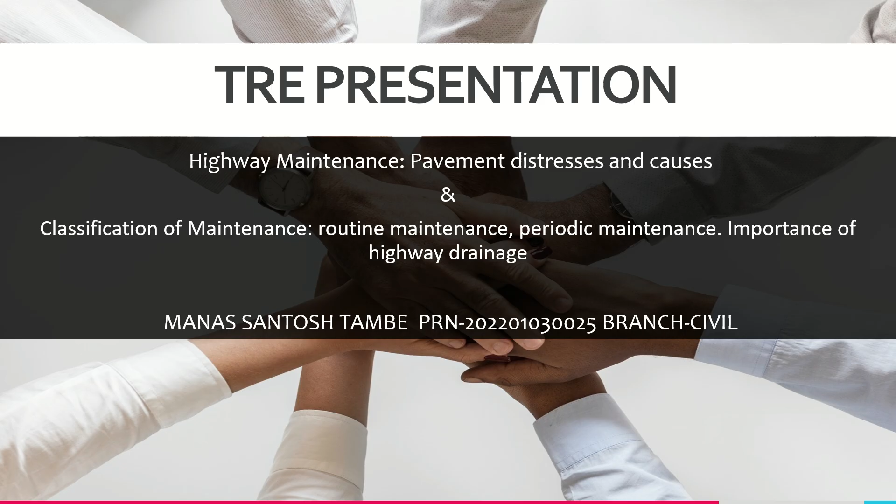Now, coming to the introduction part, we can see highway maintenance involves all activities undertaken to preserve and restore roads to ensure safe, efficient, and comfortable travel, which is a definition of highway maintenance. Coming to objectives, or why highway maintenance is essential for our life. First is ensure traffic safety and driving comfort. Second is prolong pavement life and prevent deterioration.

In our first objective, that is ensuring traffic safety and driving comfort, if there is a road which is not maintained properly, there can be high chances of traffic generation in that particular area, which can cause a high volume of traffic in that area, and which can be hectic for the people traveling through that area. So maintaining that particular pavement can be very useful for the people as well as the government to reduce the amount of time required for a person to travel from that road, as well as early maintenance can lead to less economic problems compared to afterwards. Then second is prolong pavement life and prevent deterioration.

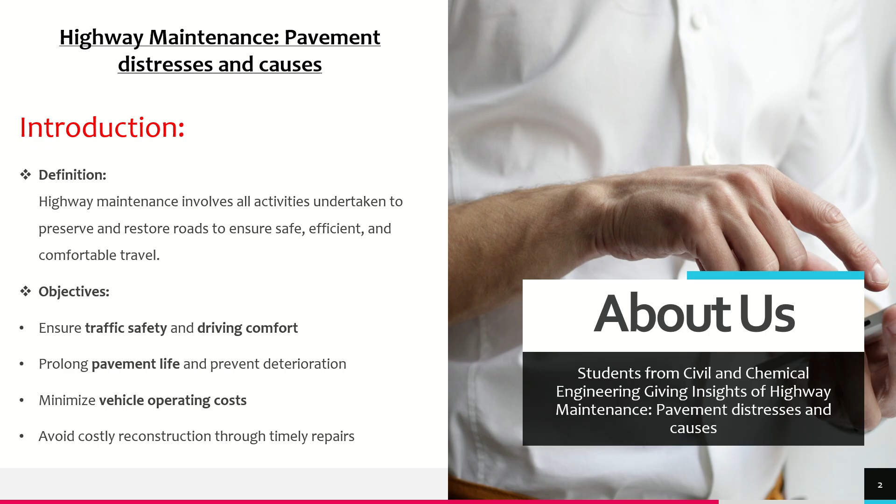Coming to the types of maintenance, first is routine maintenance, which is day-to-day minor repairs. Second is periodic maintenance, which is scheduled interventions like resurfacing. Third one is preventive maintenance, like measures to prevent future deterioration. Fourth is emergency maintenance, immediate response to accidents or natural damage. These types of maintenance we are going to see in detail in our further slides. This is a short overview of types of maintenance.

Coming to importance of highway maintenance, first is reduces long-term maintenance cost, as we discussed in our first objective. Second is improves road user satisfaction, like if I travel on a good or stable road, I feel a comfort level while traveling, as well as a driver who is driving his vehicle also feels comfort in traveling on that particular pavement.

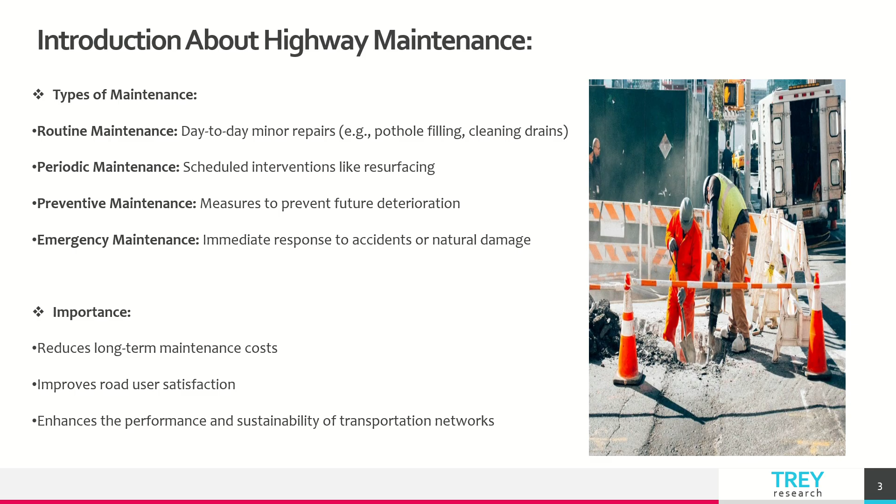Third is enhances the performance and sustainability of transportation networks. Like we can see there are various types of roads: national highways, state highways, village roads. Each have their own transportation networks. So while maintaining this, we need to take care of each and every aspect as per the type of roads in our region as well as state or country.

Then coming to introduction to pavement distresses. Pavement distresses are visible effects, defects or damages observed on road surfaces. They indicate structural weakness, functional failure or aging of pavement layers. Common causes of pavement distress are, first, heavy traffic loads. Heavy traffic loads means we are designing a pavement for a limited load, but generally commercial vehicles overload their vehicles, and due to this heavy loading, the pavement gets hampered or damaged.

The second is environmental effects, which are rain, temperature, freeze thaw. Generally freeze thaw can be seen in less temperature regions like Shimla, Manali or Kashmir. Then rain regions, we can see in Mumbai, Konkan, as well as in the southern side like Chennai, Tamil Nadu, etc. The third is material fatigue and poor quality of construction.

Like material quality, like using low grade of concrete, low grade of bitumen, low grade of steel for concrete pavements. Then poor construction quality, like various contractors are there for gaining their profits. They use low grade materials, due to which early damages happen in roads or the pavements, and due to which we need to do the maintenance of road very early.

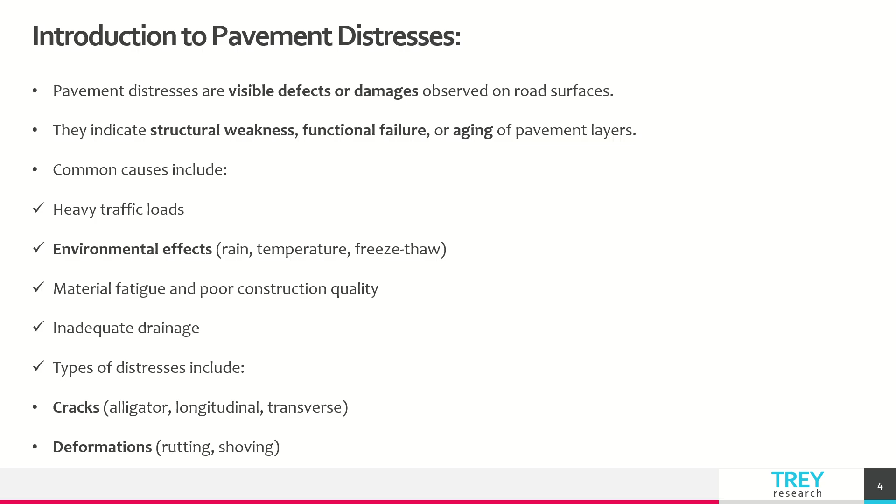Like generally we do maintenance in 3 to 5 years, but due to such poor quality of construction, we are forced to do the maintenance within 2 years or 1.5 years. Fourth one is inadequate drainage. The types of distresses include cracks, deformation, then surface defects, disintegration. These are the four types of pavement distresses.

Also, there are many types of distresses which we can see in the image, that is blow-ups, corner break, durability cracking, faulting, joint seal damage, longitudinal cracking, map cracking, patch, then punch out, separation, shoulder drop off, spalling of joints, and transverse cracking.

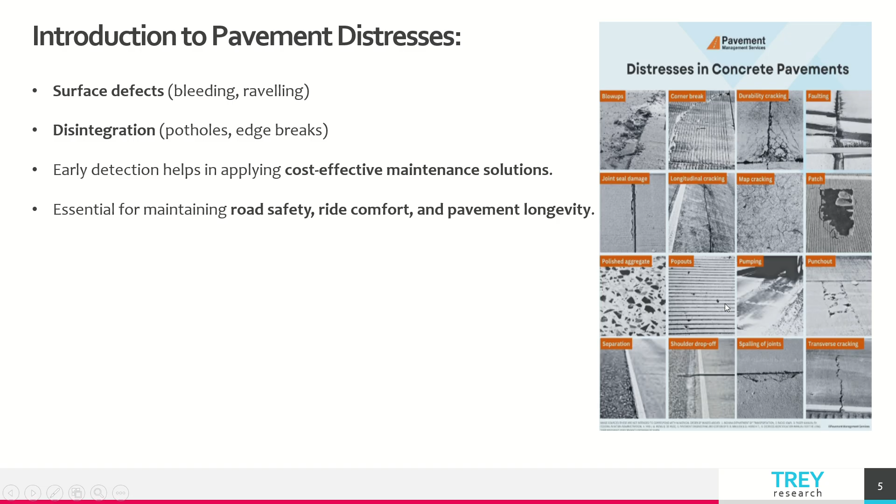Coming to the classification of pavement distresses, first is cracking distresses. This involves the development of visible cracks in the pavement surface. First is alligator cracking, interconnected cracks due to repeated traffic loads. Longitudinal cracking, cracks parallel to the center line caused by construction joints.

The third is transverse cracking, cracks perpendicular to center line caused by temperature changes. Earlier we saw it was due to construction joints, now we are seeing it is due to temperature changes. The fourth one is block cracking, that is large rectangular cracks due to aging and shrinkage of the bitumen.

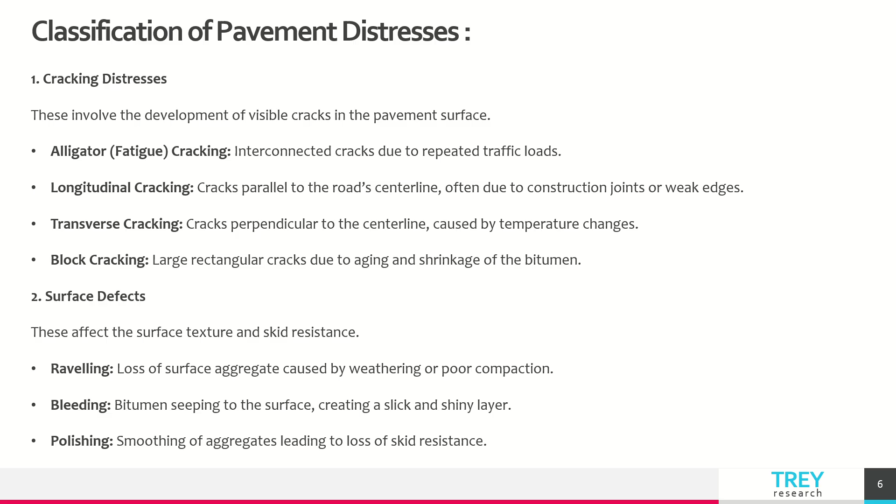Second classification of pavement distresses is surface defects. These affect the surface texture and skid resistance: raveling, loss of surface aggregate caused by weathering or poor compaction; bleeding, which can be defined as bitumen seeping to the surface, creating a slick and shiny layer; polishing, like smoothing of aggregates, leading to loss of skid resistance.

Third is deformation distress. This involves changes in pavement shape due to structural weakness. If we travel on a straight road, we see a type of U shape created on the road. This is due to the heavy load vehicles in our region.

We can see rutting, that is wheel path depression from traffic loads; shoving, wave-like movement typically at braking zones or curves; settlement or heaving, that is vertical displacement due to subgrade failure or moisture.

The fourth is disintegration distresses. This involves the breaking apart of pavement materials: potholes, bowl-shaped holes caused by water infiltration and repeated loading; edge breaks, like loss of pavement along the edges, often due to lack of lateral support; delamination, separation of layers within the pavement.

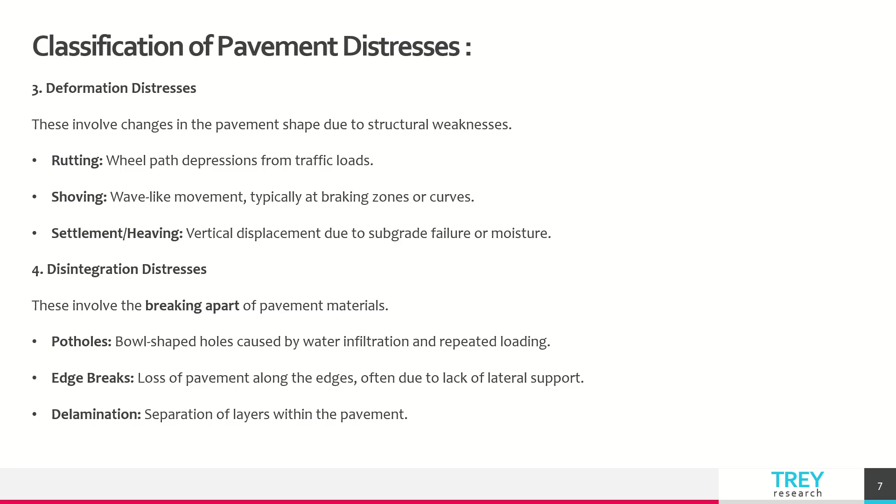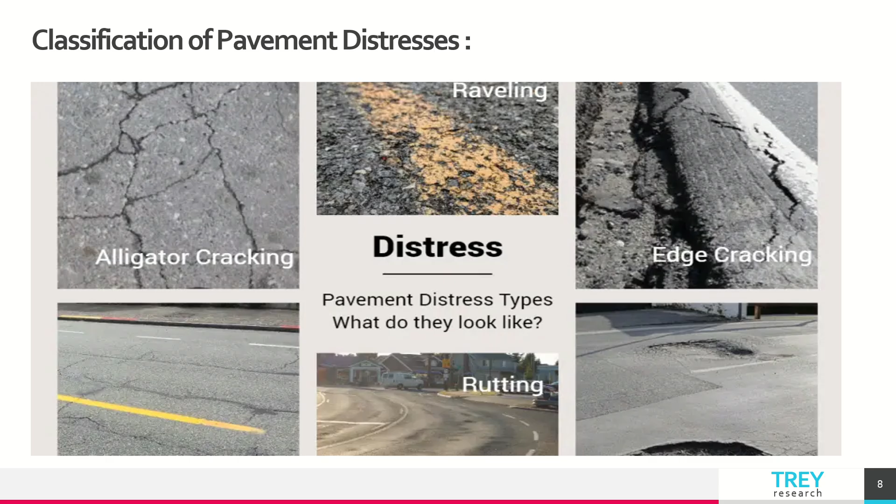Now we can see alligator cracking at the left top of the image. On mid top we can see the raveling. On the mid bottom we can see the rutting, as well as on the right top we can see the edge cracking.

Coming to the causes of pavement distresses, first is traffic related causes, that is heavy axle loads and frequent vehicle movement. Second is overloading beyond design capacity. Third is braking and acceleration zones causing localized stress. Fourth is channelized traffic flow causing rutting in wheel paths.

Second is environmental causes like rainwater infiltration weakening the subgrade, temperature variations causing shrinkage and thermal cracks. Third one is freeze-thaw cycles leading to frost heaving and surface cracking. Sunlight UV exposure aging to

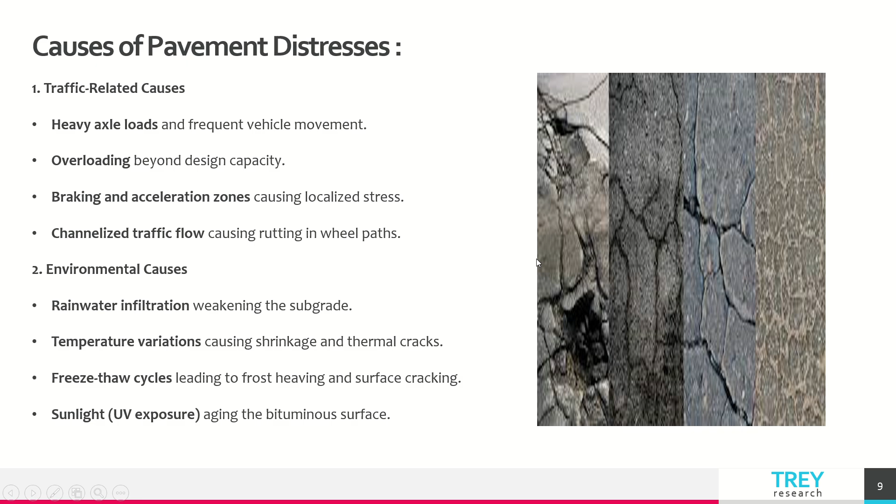Just a second. We are dealing in the meeting. Hello. Hello, am I audible? Hello, hello, hello. Yes, coming to the point, environmental causes. We have seen. Sorry, due to poor connection quality, I faced this issue.

Coming to the third point, that is material related causes. Use of inferior quality materials, improper bitumen content leading to raveling or bleeding. Third is binder aging, reducing flexibility of the bituminous layer, inadequate gradation or mixing of aggregates.

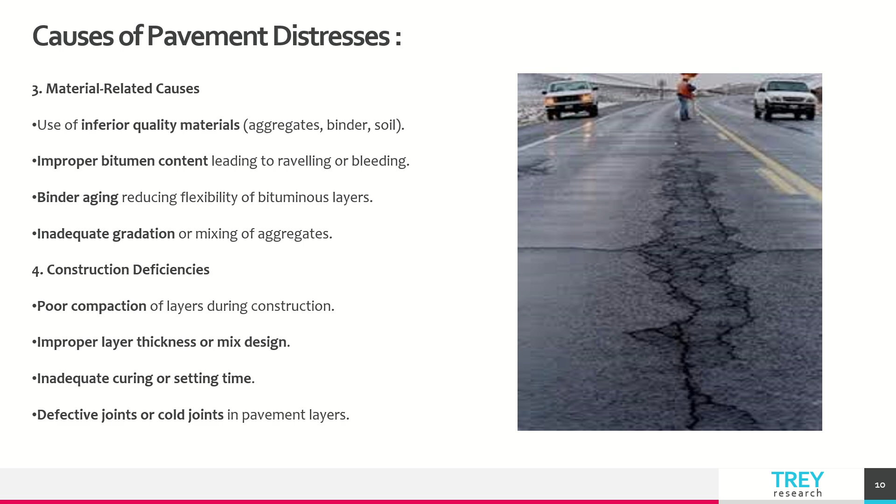Fourth is construction deficiencies, that is poor compaction of layers during construction, improper layer thickness or mix design, inadequate curing or setting time, defective joints or cold joints in pavement layers.

Coming to the fifth, that is drainage issues: clogged or absent drainage system, then subsurface water retention, lack of slope or camber. Then design related errors: under-designed pavement thickness, then wrong choice of pavement type for expected traffic and soil conditions, ignoring soil strength or traffic growth projections.